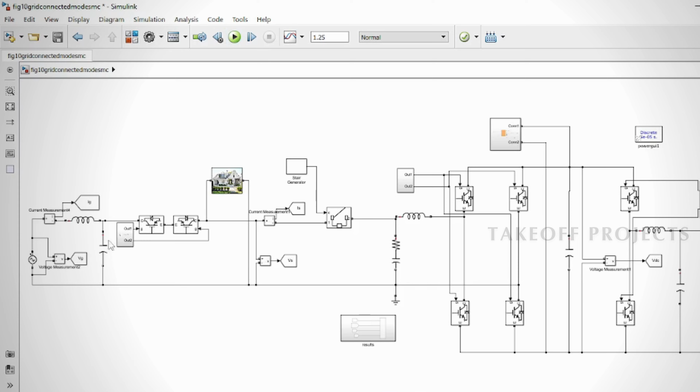In this project, implementation of a solar photovoltaic array-powered grid-connected residential electric vehicle charger is presented, which caters to the need of an EV, household loads and the grid. The charger is enabled to operate autonomously using a PV array for providing uninterruptible charging and power to household loads.

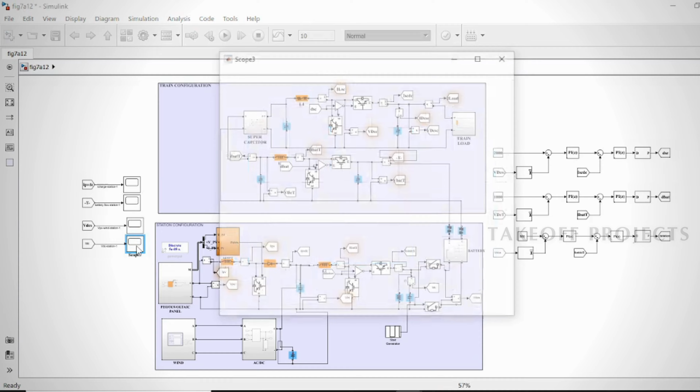This project aims to develop a comprehensive control and management system for a railway system that is connected to microgrid stations. The objective is to optimize the power supply, operation, and energy management of the railway system by utilizing microgrid stations, ensuring reliable and efficient train operations.

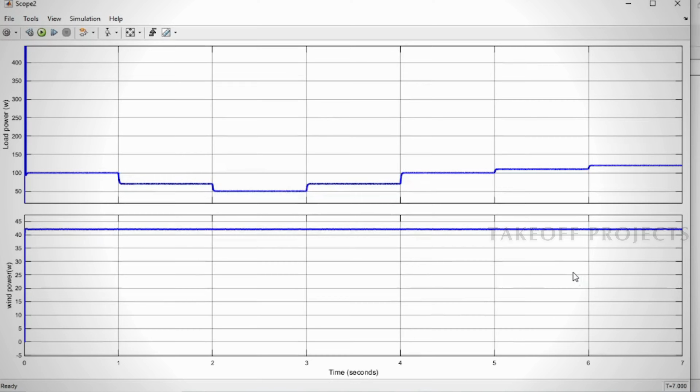This project focuses on developing an energy management system (EMS) for a small-scale hybrid wind solar battery-based microgrid. The EMS will optimize the utilization of renewable energy sources, such as wind and solar, along with battery storage, to ensure efficient and reliable power supply for the microgrid.

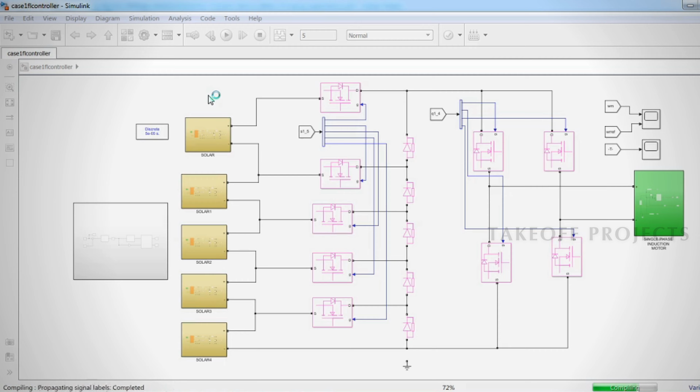The project aims to develop a fuzzy logic control system for a solar photovoltaic-fed modular multilevel inverter specifically designed for marine water pumping applications. The system will utilize solar energy to power a water pump in marine environments, providing an efficient and sustainable solution for water pumping needs.

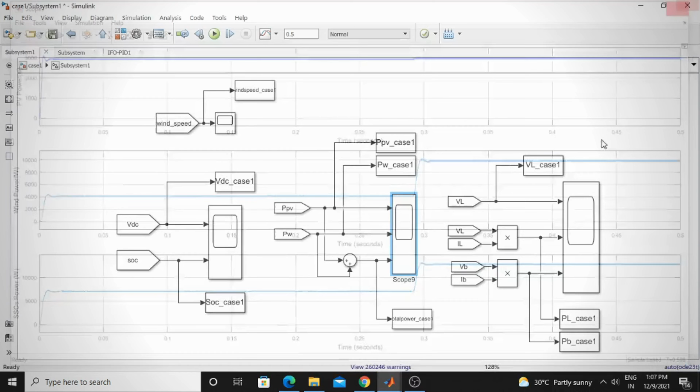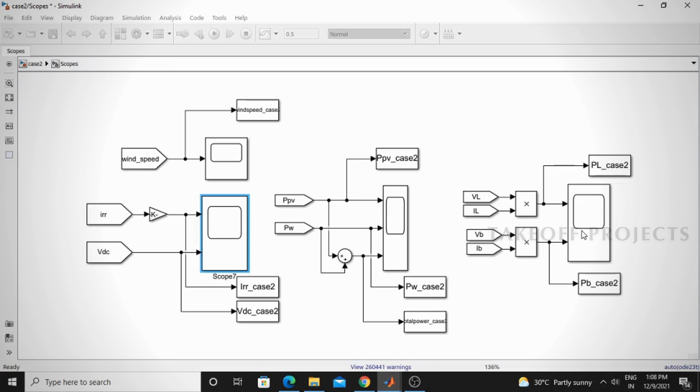The project, Hybrid Wind PV Battery Energy Management Based Intelligent Non-Integer Control for Smart DC Microgrid of Smart University, aims to develop an advanced energy management system for a smart DC microgrid within a smart university environment. The project focuses on integrating multiple renewable energy sources, including wind turbines, solar panels, and battery storage, to optimize energy generation, storage, and consumption.

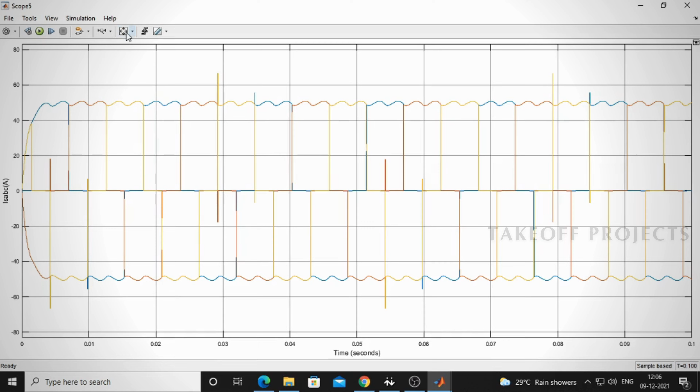This project aims to enhance power quality in electrical systems by implementing a photovoltaic-based shunt active harmonic filter. The proposed solution utilizes PV technology to mitigate harmonic distortions and improve the overall power quality of the system.

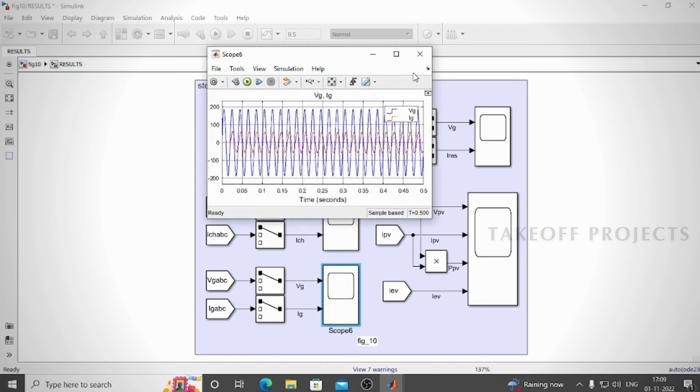The PV Integrated Multifunctional Off-Board EV Charger with improved grid power quality is a project aimed at developing an advanced charging solution for electric vehicles that incorporates solar PV integration and focuses on enhancing the quality of power supply to the grid.

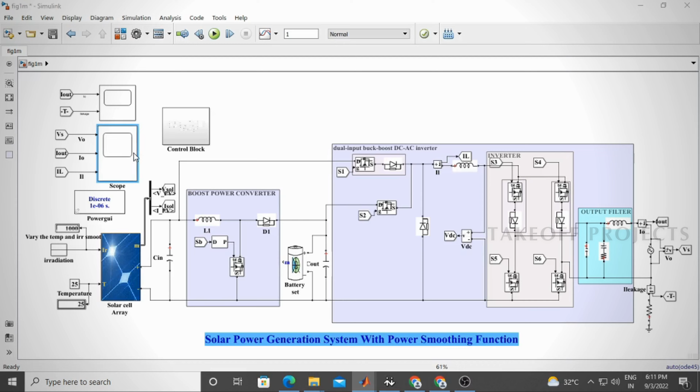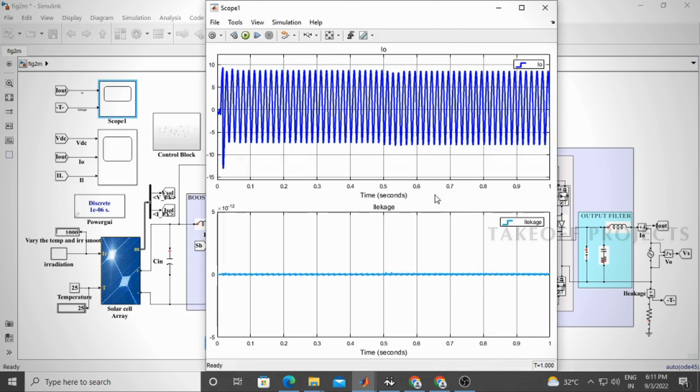The project aims to develop a solar power generation system that incorporates a power smoothing function. Solar power systems are known for their intermittent nature due to changes in sunlight intensity and weather conditions. The power smoothing function addresses these fluctuations and ensures a stable and consistent power output, enhancing the reliability and efficiency of solar energy generation.

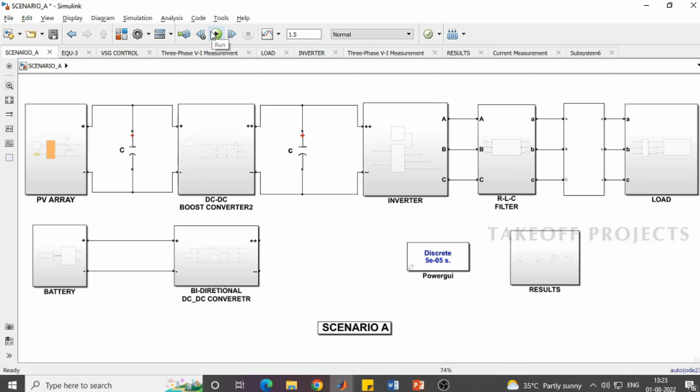This project focuses on the development of a standalone photovoltaic battery system using a two-stage converter topology and voltage source converter control. The system aims to efficiently integrate PV generation and battery storage to provide a reliable and sustainable power supply for standalone applications. These systems combine solar PV panels and battery storage to meet the electrical demands of the load.